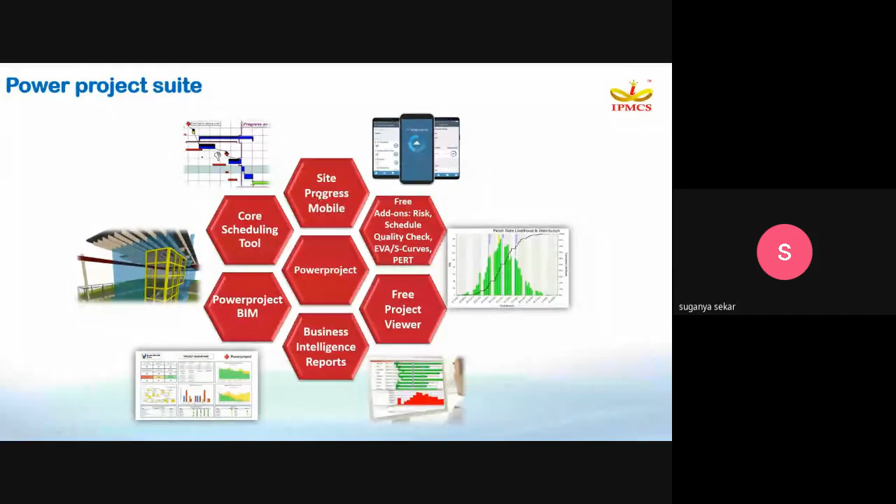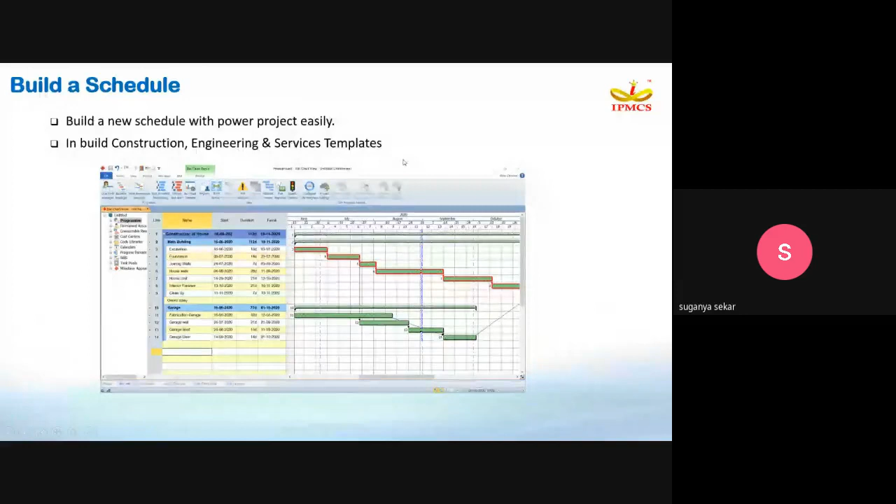In Power Project, you can create a new schedule. We have inbuilt construction, engineering, and services templates available. You can also access schedules formed in other project management software, for example Primavera or MS Project. If you already created a schedule in a different format, you can open that project in Power Project directly without any data loss.

Let's see how to create a schedule. I'm opening Power Project software.

Once the Power Project software has been opened, you can go to File and create new. Under new, you can see a lot of templates available: construction, engineering, housing, MSP, Primavera, services, and so on. If you want to create a project related to construction, you can choose the construction template. The advantage is that inbuilt construction related codes and resources will be available as samples.

Select construction template, then give the project name: construction of building. Then you can give the file name, Project 1, and click create. Just give OK. Now the project schedule has been created.

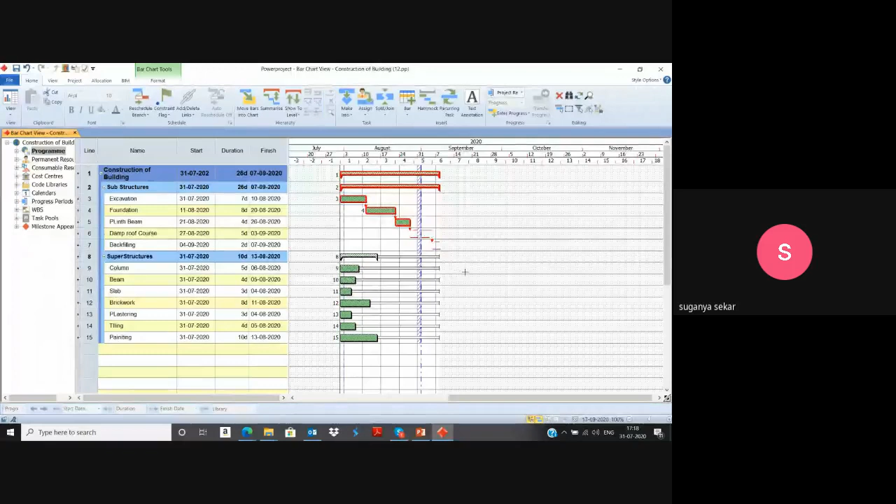Suppose if you want to make it start to start also, then you can give it. So after completing the backfilling, I'm starting the column activity. Then after column, beam will come, whereas column, beam and slab are parallel, so I'm giving start to start. Next, after completing the beam and slab only, I can do brickwork. Similarly, you can give multiple relationships also, then after that you can give the start to start.

As well as you can give the finish to finish relationship between some of the activities. So after giving the relationships, again give the reschedule. Now you can see parallel activities also there, like start to start, whereas here finish to finish. So I'm giving plastering and tiling together as a finish to finish. So like this, you can change the relationship.

By default you can apply sequential relationship. Suppose if you want to complete the project, if you want to do the schedule compression, then you can go for start to start and finish to finish relationships.

So after applying the relationships, you can see the activities displaying in a red color, like red color borders. Red color borders mean critical activity, and without red means it's a non-critical activity. So as we already discussed, if you delay a critical activity, it will directly impact the finish date, whereas if you delay a non-critical activity, it will not impact the finish date.

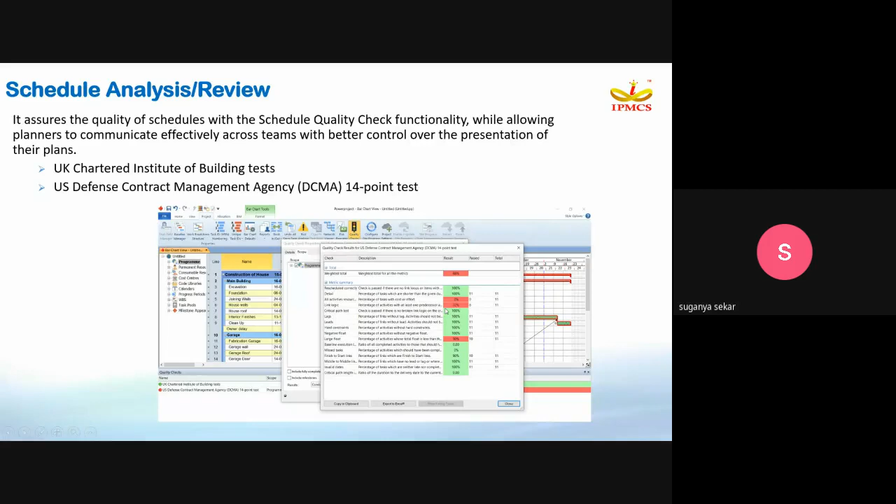There are 14 points available. Whether this schedule has satisfied those 14 points or not, this information can be fetched from this quality check functionality. You can see the attached screenshot. So similarly, we can run this quality check functionality here.

Go to the project tab. Here you have the quality checks. Select this and you can run the project schedule, either UK Chartered or US Defense. I'm going to run the 14-point assessment. Right click, select properties, then select scope, check in the overall project, and execute.

So right now the schedule has been framed with link logic. The first activity and last activity without predecessor and successor is acceptable. This report will be helpful for you to present your plan confidently. Close.

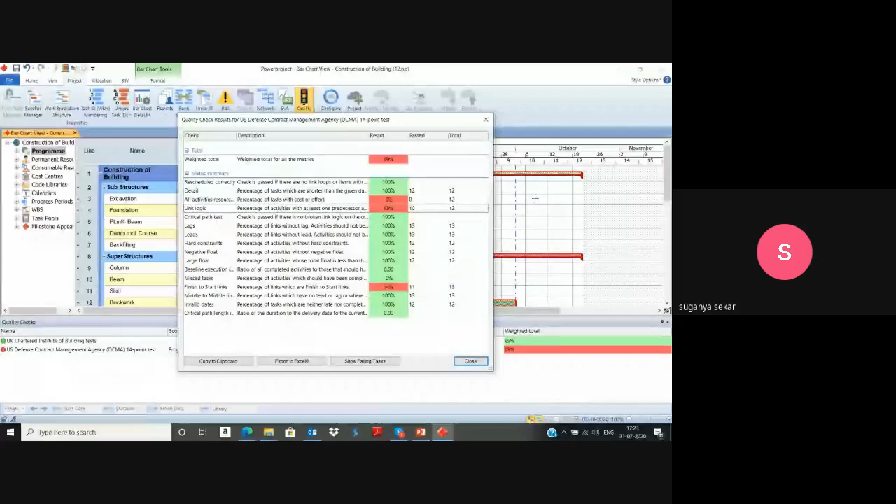Next, after running the schedule analysis, we'll move on to cost or resource management. When a plan is completely ready, you have to prepare scheduling and then resource management. Scheduling has been completed, next is resource management.

Resources means anything required to complete the project. Generally in projects we follow two kinds of contracts: unit rate contract as well as lump sum contract. You can capture these using resources.

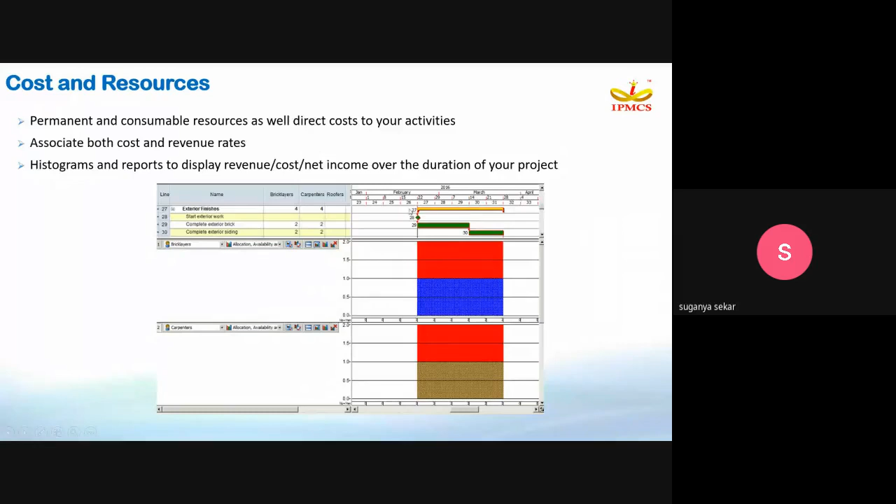Here we have permanent and consumable resources available. You can generate income and cash flow reports also. In other software, you can analyze only one single resource or histogram in a single page, whereas here in Power Project, in the same page itself, multiple histograms can be viewed.

So go to Power Project. I'm creating one resource here. You can see the project view, permanent resource and consumable. Human resources and machineries can be created under permanent resource, whereas materials or supplies can be created under consumable.

So you can create a permanent resource. I'm creating a new permanent resource, one is civil engineer. So how many civil engineers are available? One civil engineer, or two, or three - that information can be entered here.

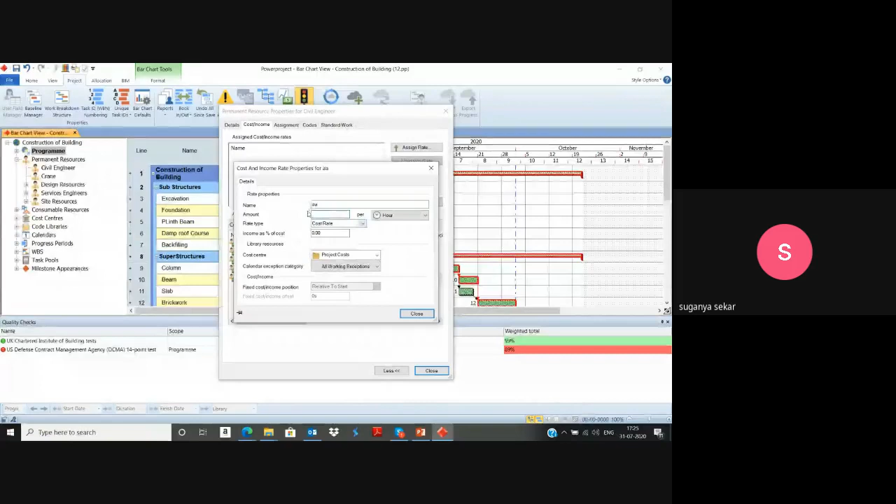Then you can go to cost or income and create the cost. Double click - what is the cost for this civil engineer? 500 per day. You can enter it per day or per hour. Close. Now you can assign this cost.

Then go to assignment. You can check the assignments.

Next, you can create resources like cranes already available. Here you can see under consumable resources, bricks are available.

Now you can assign these resources to the activities. You can select one activity, or if you want to assign for all activities, using shift you can select all the activities in the bar chart. Now you can assign civil engineer for all the activities.

Whereas cranes, you're going to assign only for the excavation activity. Then bricks can be assigned to the foundation activity. So like this, you'll be assigning all the resources.

So after assigning the resource, you can analyze here. In the bar chart, resource graphs are also displaying resource bars. If you don't want to view the resource bars, using format, you can remove that.

Next, we want to generate the resource analysis. Resource creation has been done and assigning has been done. Next is analyzing, so for analyzing we will go for the resource histogram or spreadsheet. I'll go for the resource histogram, choosing the resources: civil engineer, cranes, and bricks.

Next, you want to see the allocation availability for all the resources together. So you can check here, otherwise you can check only allocation to date.

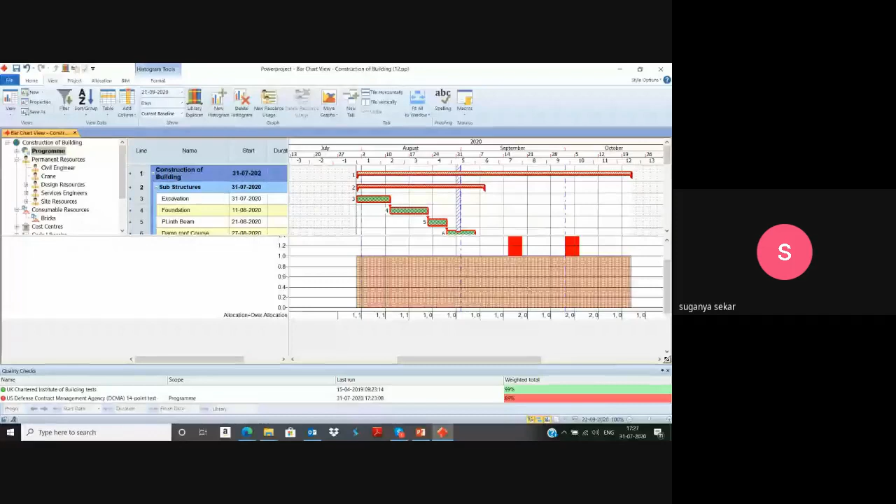So these are the places the resources are overloaded. Checking civil engineer alone, we have only one civil engineer. On these particular dates, we need 2 civil engineers. So this shows the over allocation.

Also, you can analyze the resource usage spreadsheet. You can see here it's properly allocated showing in green color, over allocation showing in red color. Suppose if anywhere under allocation happened, it will show the blue color.

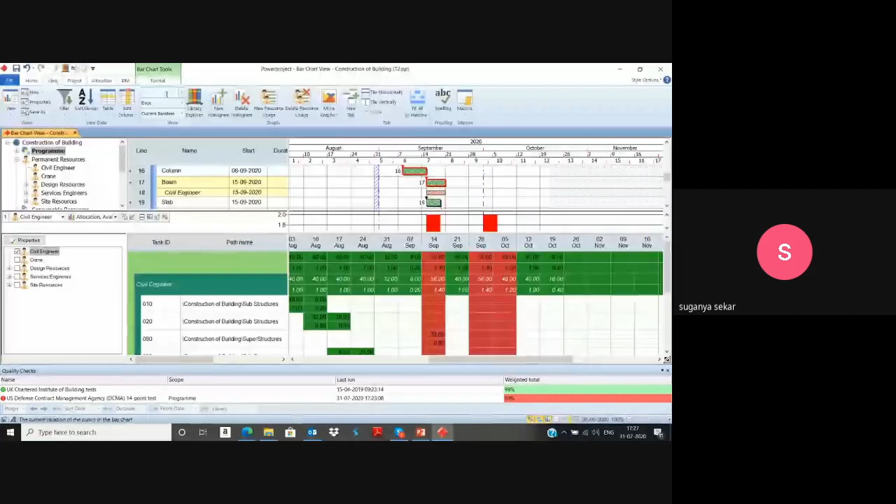For example, I'll be displaying the resource bars and deleting civil engineer for some of the activities. So those places it will be free. This is how you'll be viewing the resource graphs.

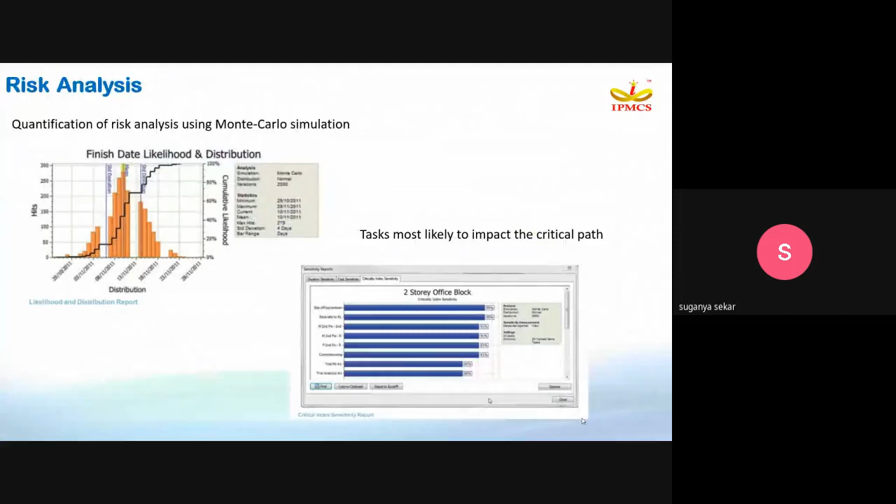After assigning resources, the plan is ready. Next, you need to go for the risk analysis. You can run the risk analysis here. Go to project tab, select risk analysis, go to results, select generate.

If you give generate, it will generate the possibilities. There's like 20% chances to complete on this date or this cost. So 10 different possibilities have been given, including 10% chances to complete the project on 15 October.

You can see the finish dates also. From the schedule, it has generated 20th October, whereas maximum 26th I can complete. So using this, you can fix the buffer time as 6 days.

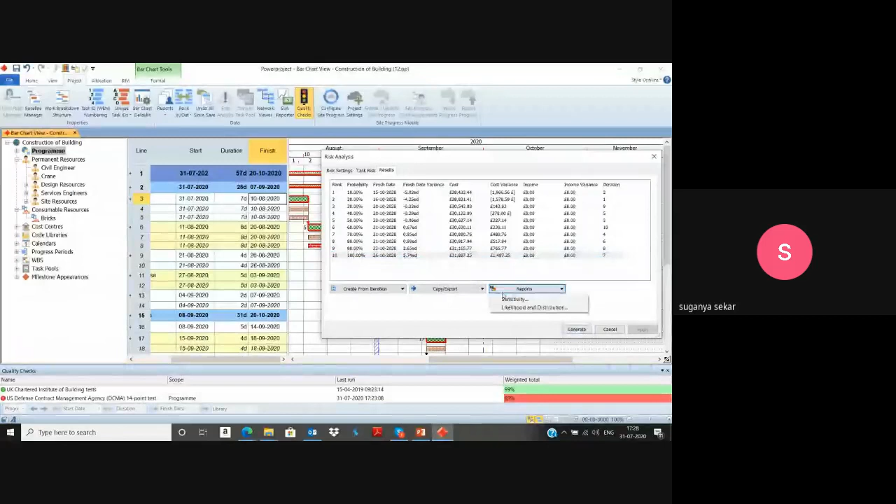Suppose if any delay happens, it will consume within the 6 days. If not, you'll be completing the project ahead of schedule. You can generate this risk report in a graphical format also, duration wise, cost wise, income, margin.

Similarly, you can generate the sensitivity report: cost sensitivity, criticality, as well as duration sensitivity.

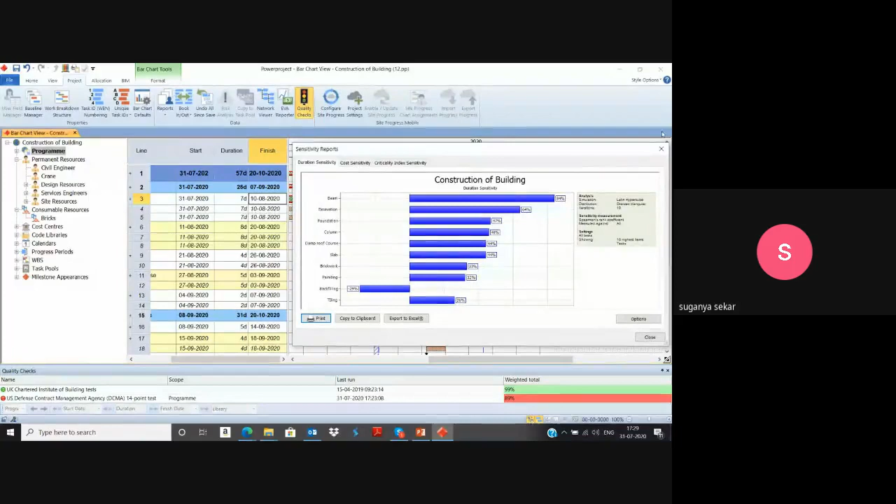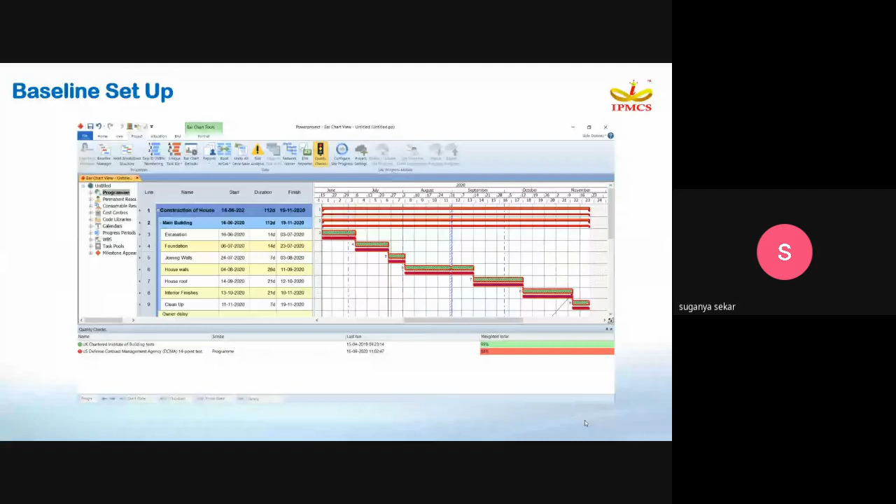So once the plan has been ready, the next step is you need to set the baselines. Baseline is nothing but freezing the plan in the project management software. I'm going to save a copy of this plan.

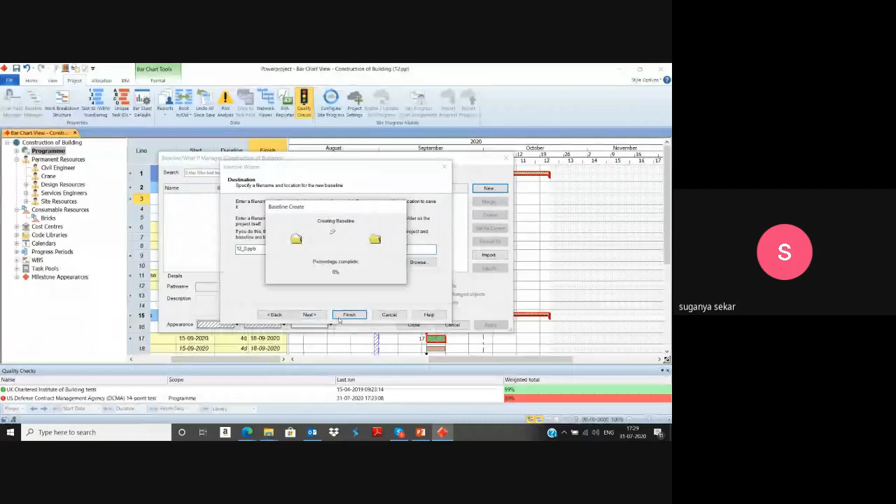Go to project tab, select baseline manager. You can create new; I'm giving R0 or baseline 1. Next, finish. Once the baseline has been created, close.

You can see here the baseline is also displaying. Even for the resource bars, baseline is displaying. You can hide that so only the normal bars are visible here.

So after the baselines, you can start updating your project. You'll be updating the project based on what frequency: weekly, fortnightly, or monthly. First, you need to set the progress periods. You can go to the library explorer.

Here it is showing 31/7. Again, add new progress period; I can give 1, 2, 3. So 31/7 the project is starting, till next week we are going to check 7th August, next is 14th August, next is 21st August. Like that, you'll be setting the progress periods.

Now you can go to the projects page and update the progress. Select the first activity, right click, enter progress. So here you can enter: the project is starting on 31st, ending on 10th, whereas 3 days will be pending. So now you can enter around 70% completed.

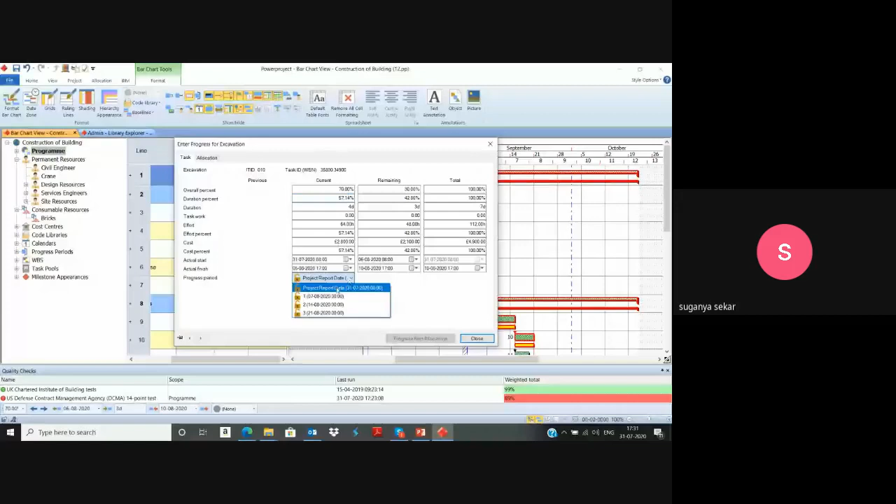Till the first progress period close, you can go to the home tab, select reschedule. Here you can choose the progress date and click OK.

Now you can see the deviations are clearly visible. So you plan to complete on this date, whereas the project is completing on this date. Because of the delay in the first activity, all activities have been delayed by 1 day. The project completion date will also change accordingly.

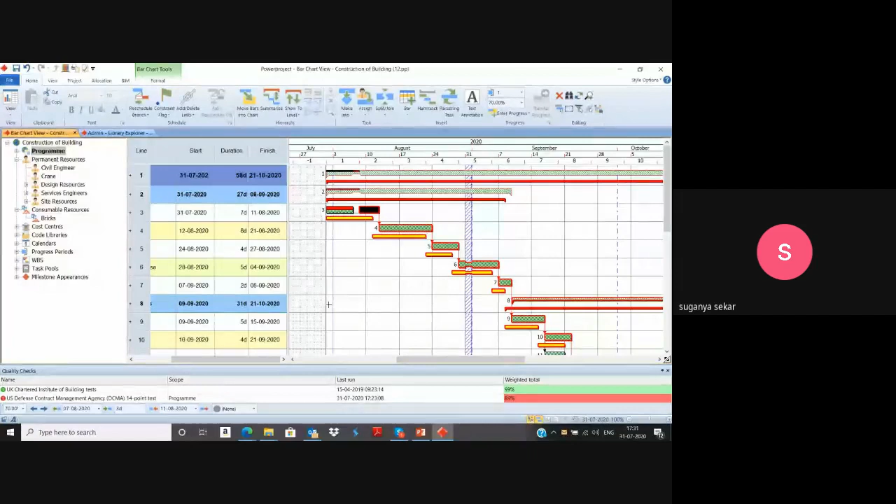This is how you will be maintaining a single project. Also in Power Project, we have seen additional features like risk analysis and schedule quality check functionalities and more.

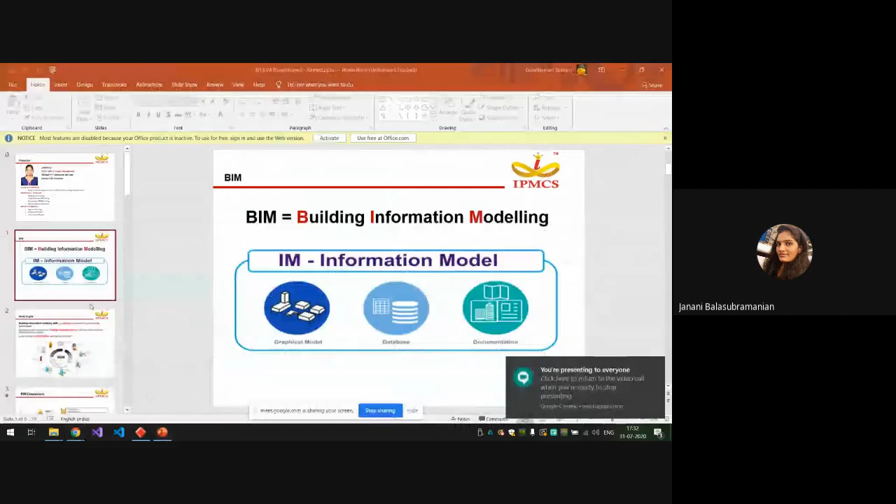I'm the presenter for the next session, which is about Power Project and integrating BIM into Power Project.

We have already seen what is BIM. BIM is building information modeling. Linking our project information to our 3D model of our project is what BIM, building information modeling, is. It is not a tool, it is a concept which we adopt for our construction project. BIM is a process supported by various tools and technologies. It is a generation and management of digital representation of our project information, like physical and functional characteristics of our project. When we implement BIM in our project, it leads us towards working in a collaborative environment.

So we have multiple dimensions in BIM. We saw yesterday what is 3D. 3D is linking the third dimension of our project, which is height, so we get a 3D model useful for visualization and clash analysis purposes. The next dimension is 4D. 4D is linking our project planning and scheduling to our 3D model. Then the model is called a 4D model, not a 3D model.

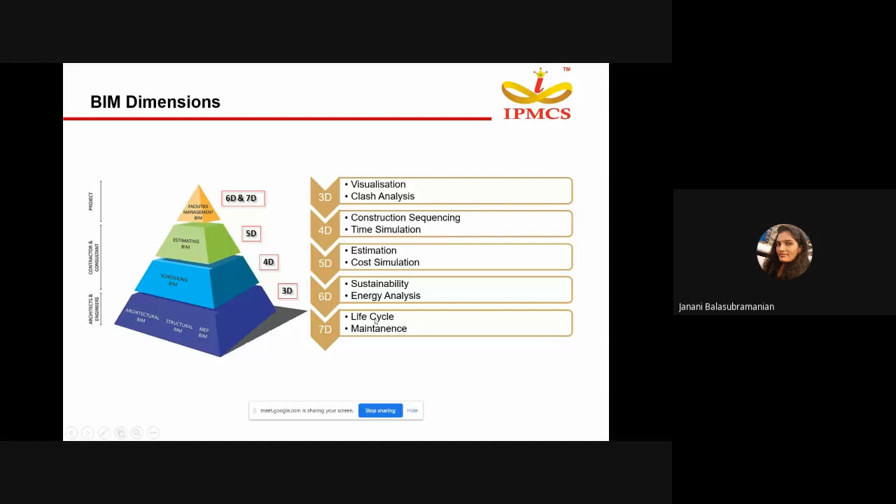So today we are going to focus on the 4D BIM part. 5D is linking the project estimation and budgeting. 6D is linking sustainability and energy analysis data. 7D is linking the as-built information, lifecycle, and maintenance information to the 3D model.

As we saw 4D BIM, let us see in detail. 4D BIM is a process of adding our scheduling data to our project information model, and it helps us have a step-by-step visualization. Rather than seeing our project progress in the Gantt chart, we can also see a step-by-step visualization of our project progress. Stakeholders are people involved in our project, working directly for it, so they can have a detailed overview of the entire process. With this 4D BIM, we can stay on top of everything that happens in our project site.

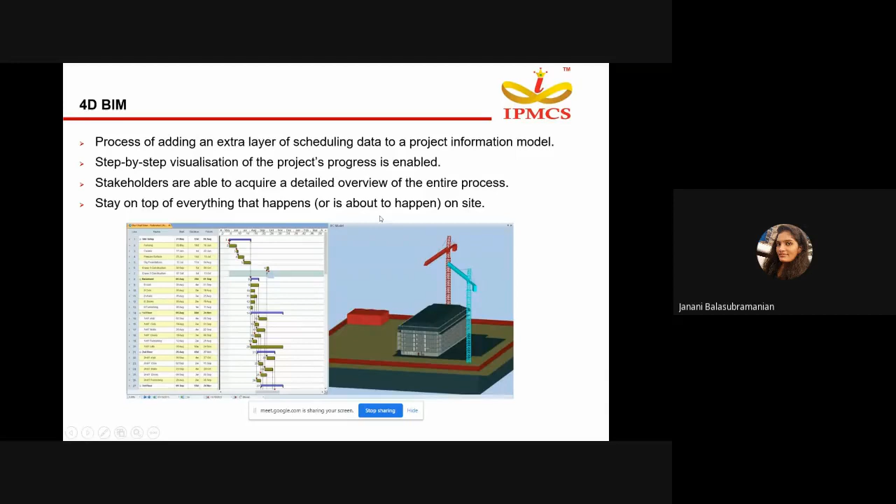4D BIM technology in the construction industry enables us to have clash-free construction scheduling. It helps to do a 4D graphical visualization. We can do optimal resource utilization and better interdisciplinary coordination. Interdisciplinary coordination leads to a collaborative working environment between the project team members.

So 4D BIM, when we link a project schedule to the 3D model, is what is called 4D BIM. The fourth BIM dimension is construction sequencing, which is achievable with the help of the Power Project tool. Power Project is an effective 4D planning and scheduling tool. We can call Power Project an integrated 4D BIM solution because here we can use our 3D or BIM model, and we can create our schedule, or if we have already created a schedule, we can link it to our 3D BIM model. We can do our resource management, risk management, and update our progress information.

So of Power Project features, we have covered project scheduling, resource management, and risk management. Next in this session, we are going to cover what is the 3D visualizer in Power Project, and how to do a 4D simulation — what simulation is, and how to do 4D simulation.

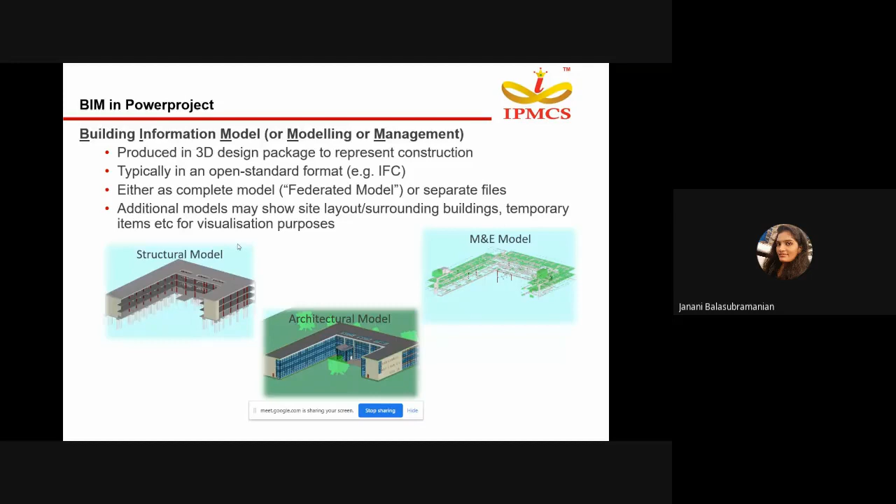So first is about the model walk-in view. Once we import the IFC model into Power Project, we can see the category of each and every element and which category it belongs to. We can see the IFC properties of each element in the entire model, and we can have a walk-in through the model. We can walk inside the model, and we can also see the split view, where rather than a complete model, we can split and view each element separately.

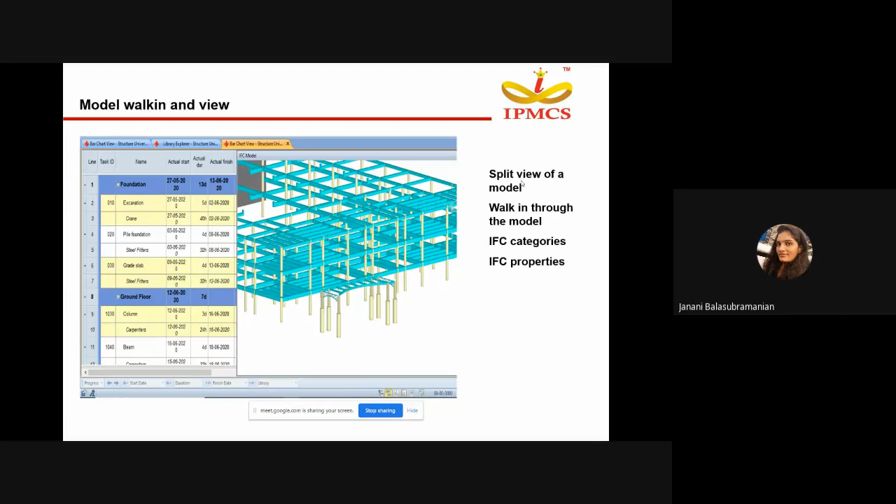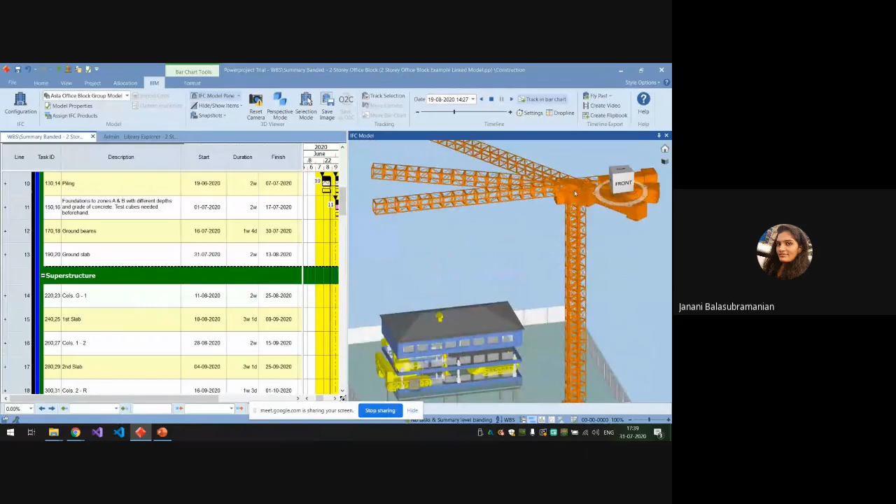Let us see how we can view the model. Say I have already created a schedule here. Now when I want to view the model, I'll use the IFC model pane. So you can see here my IFC model with the complete project information, including the tower crane and the excavator that I use.

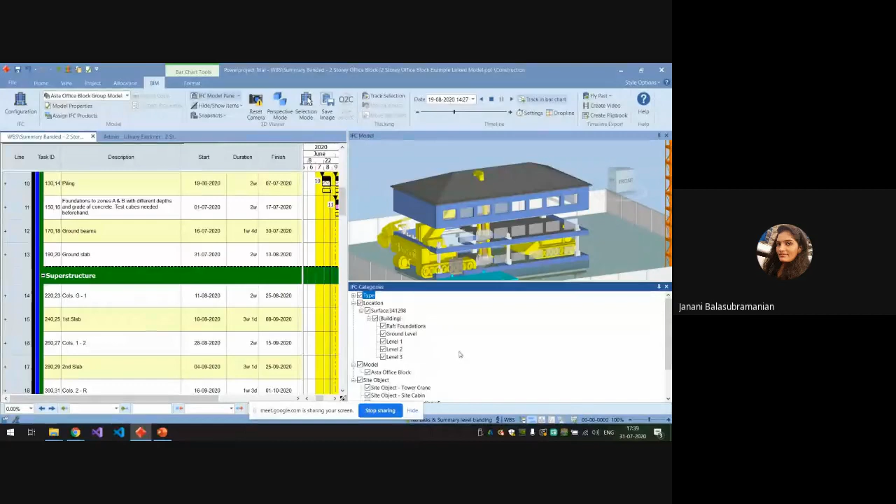When I want to see the properties or categories, from the drop down I'll select categories. Here in the category, the site object, so many site objects are there in this model. And location, again, I can choose when I want to see only the ground floor. I'll select only ground floor elements to be visible. So now if you see, along with the information, only ground floor related elements are visible.

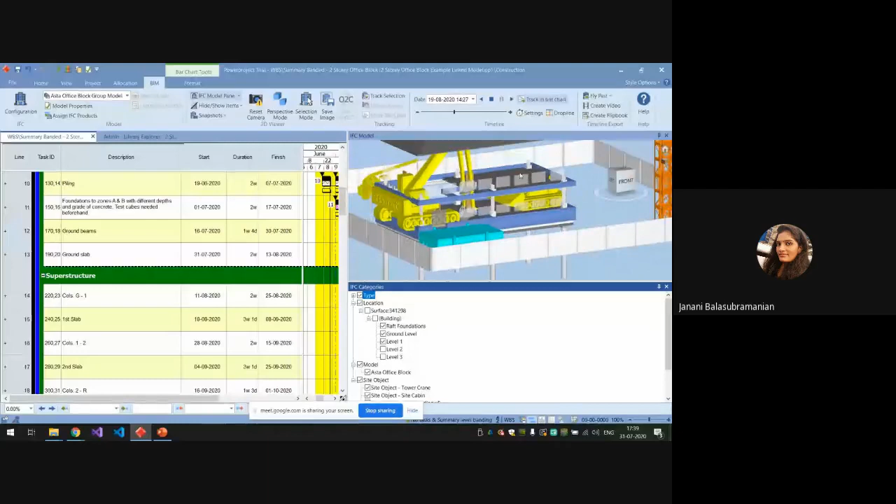Same way, when I want to see the raft foundation, you can see the raft foundation. Level 1 gets built up, level 2 gets built up, level 3 also. So if you want to see the total building, we can see that too. So likewise, you can bifurcate your information.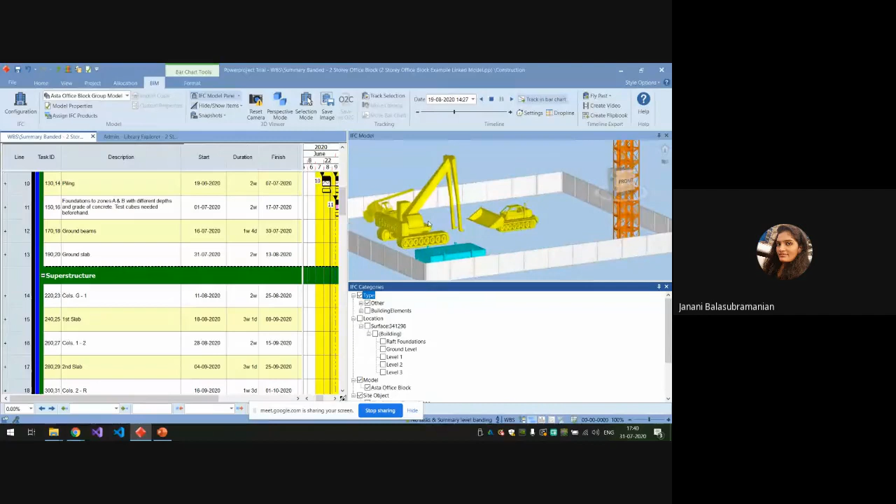And if you want to see only your site machineries, I'll select only site machineries to be visible. So here you can see, within the fence of our project, what machineries we are using - excavator, small bobcat, and the tower crane. Now that we've seen the categories, I will show all elements to be visible.

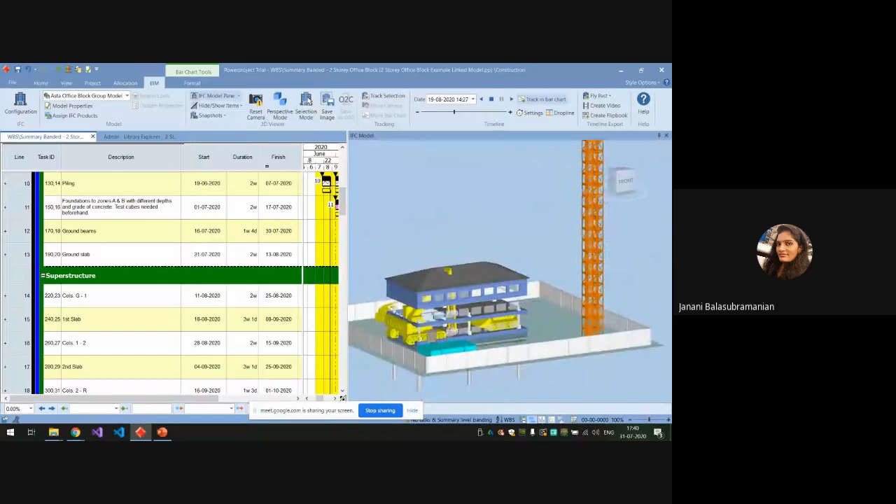Next, when I want to see the property, say I'll select this element. To see the property, I'll again choose IFC property. Say this is a roof, 125 mm thick slab - area of the roof slab, volume, perimeter, width, and whether it is a load bearing slab or a non-load bearing slab.

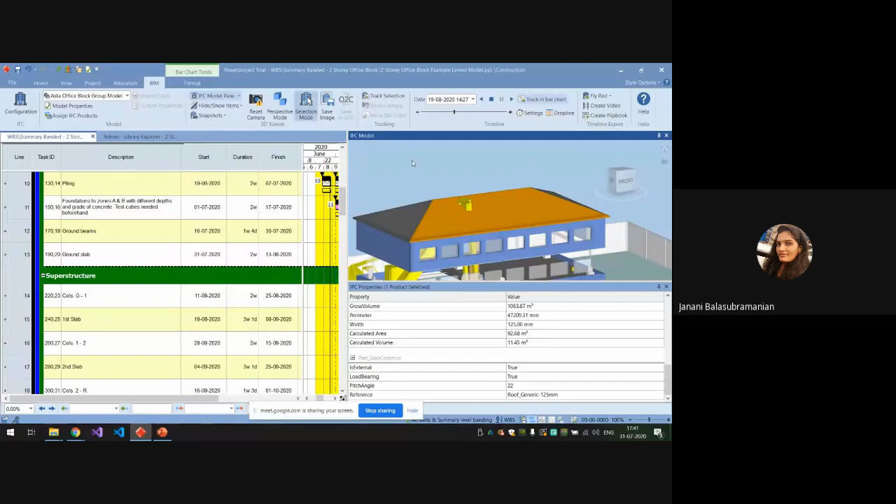Another element, such as this - this is a wall, exterior wall. The material is brick with common fiberglass batt concrete. You can see the wall footprint area and the total area of the wall, height, length, volume, and even the energy data, like thermal resistance, thermal mass, heat transfer coefficient, absorptance value, where it is located, and how it is filled. So all information, including energy analysis data, can also be seen inside Powerproject.

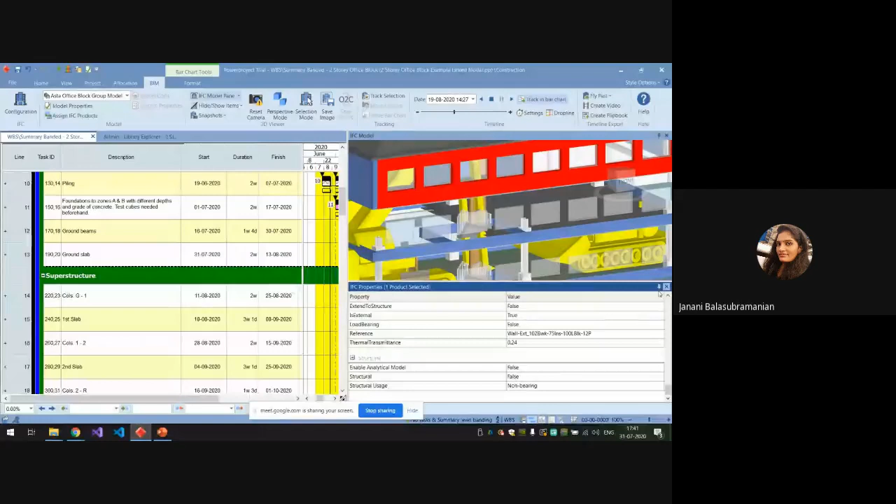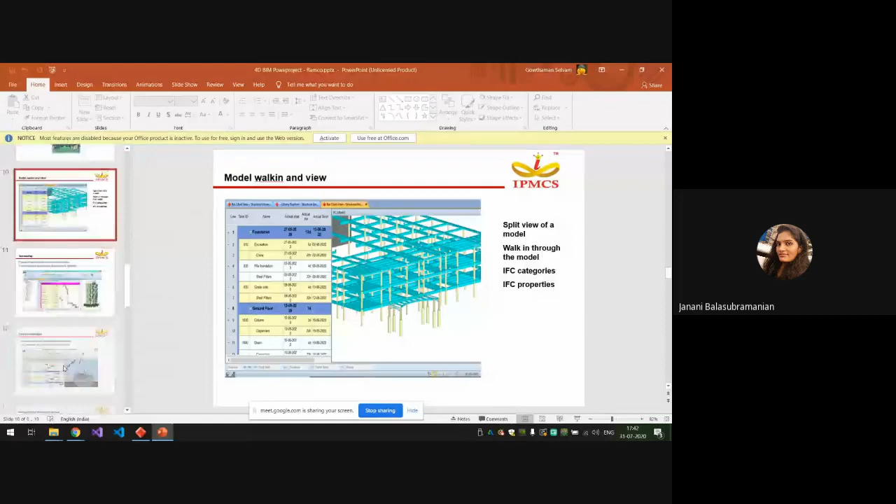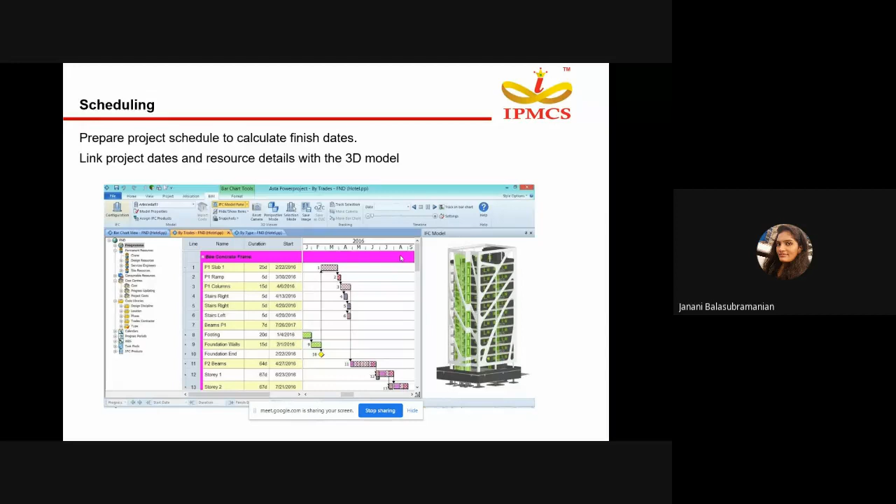Now moving to the presentation - we have seen how to view the model inside Powerproject. Next is about the scheduling part. As I told earlier, if we have an already created schedule, we can link our BIM model to the existing schedule, or we can also prepare a new schedule from the BIM model. So we'll see the scheduling part.

Now, when I want to prepare a schedule from the model, it's just as easy. This schedule is already linked with the model. Now when I want to prepare a new schedule from the model, just select the element, drag it and drop it into the Gantt chart. It will be placed in your Gantt chart, and here you can create your schedule - just drag and drop. Here you can name your element, say this is a wall. So from the model also, you can create your schedule.

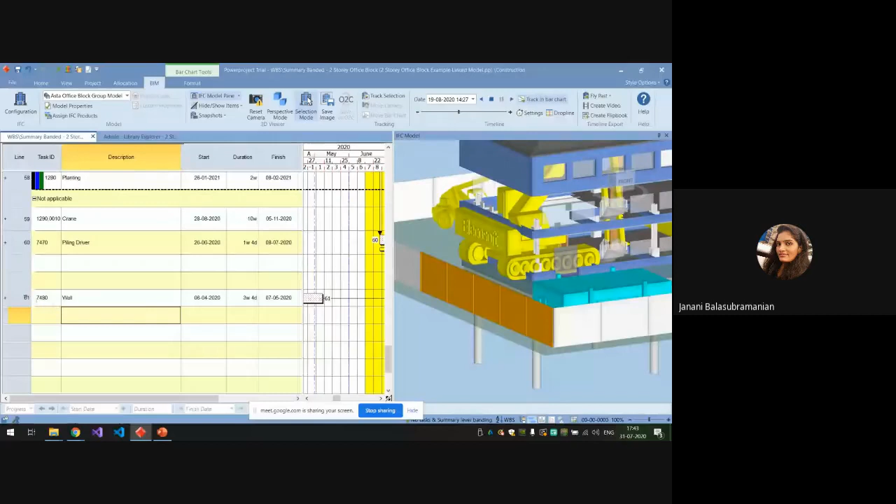I'll delete this. Another way is you can also filter your model. Here in Powerproject we have IFC products and searches. Under IFC products I have foundation walls, ground floor, say foundation walls.

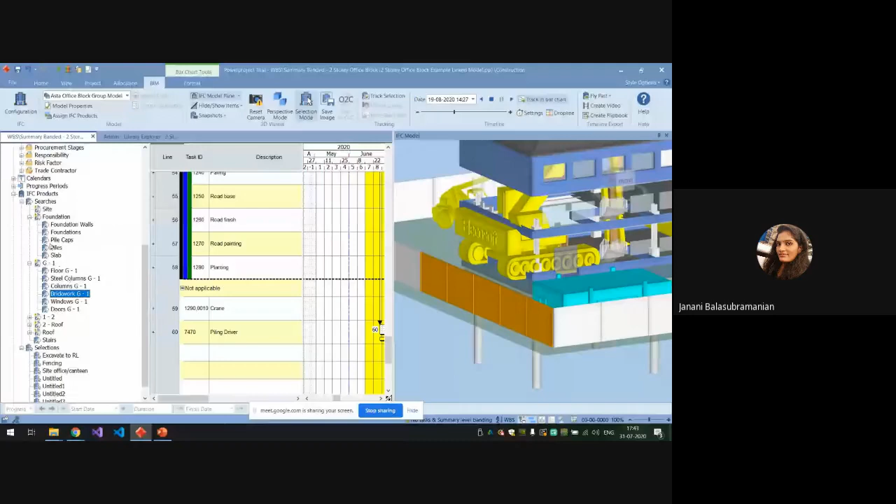So I can see this foundation walls alone from the model just by using filter criteria. I'll make it show in viewer. So you can see this is your foundation wall, which is highlighted in red.

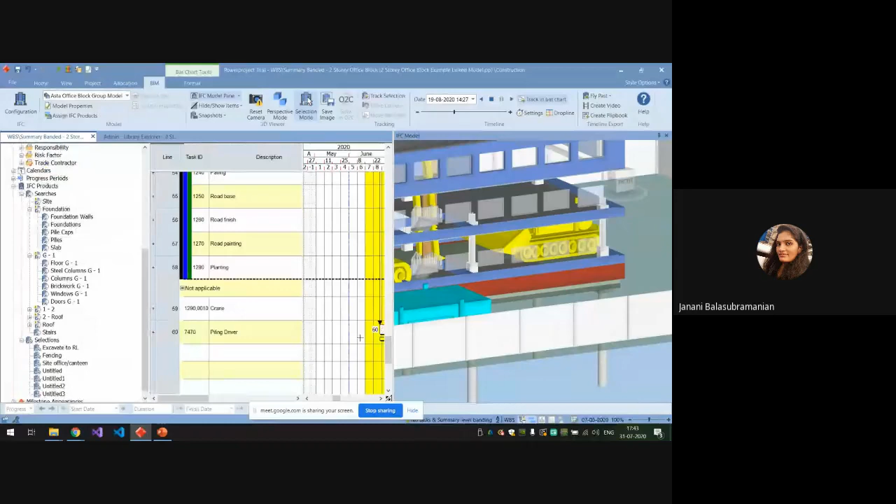When you create this IFC filter criteria, you can also link this criteria to your existing schedule just by dragging and dropping. So this is about preparing the schedule.

Next is about progress updation. Once our baseline schedule is prepared, next is about updating our site information as per the execution team. So we can monitor our project and update the progress information here in Powerproject.

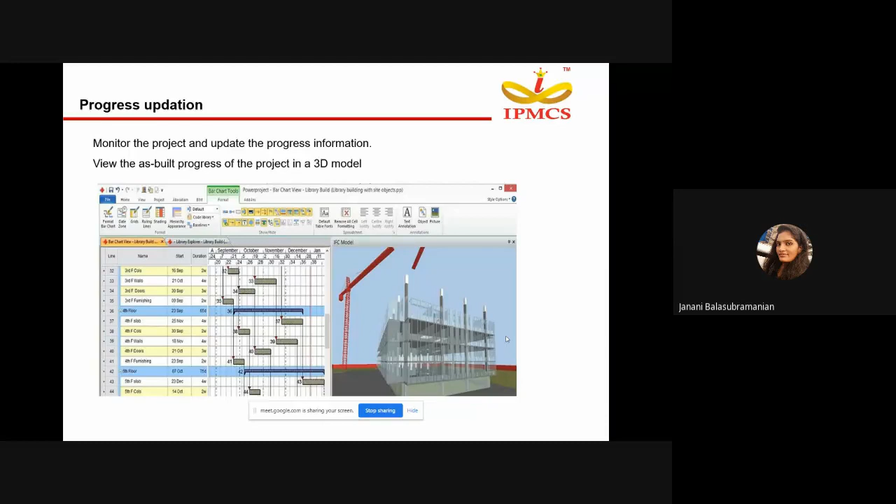The updated progress information can be seen in Gantt chart and also in the form of a 3D model. This project is actually updated with the actual dates and also baseline dates.

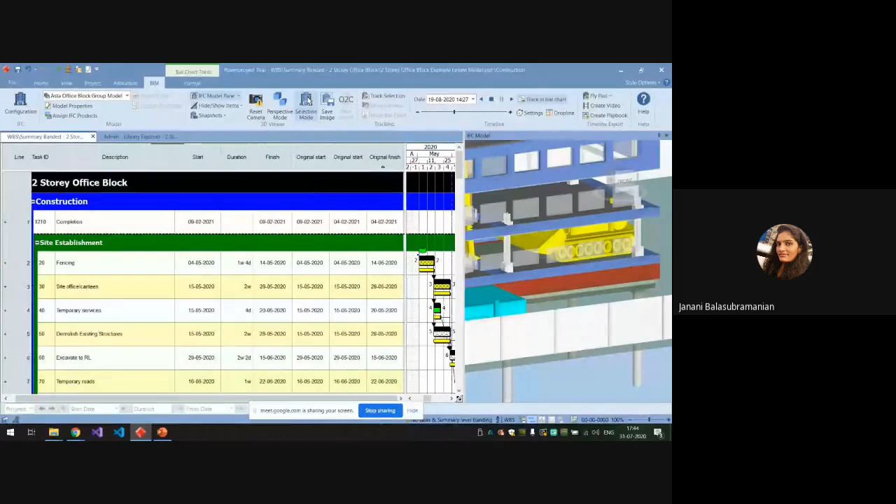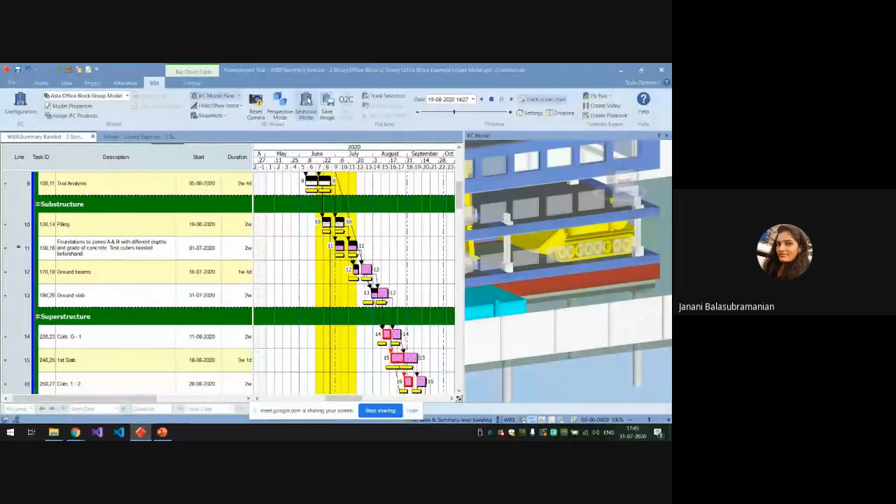I'll show you the dates here. Start and finish are the actual dates. Original start and original finish are the baseline dates. So here my activity is being updated, you can see in the Gantt chart also. There is no deviation till foundation activity, but after foundation there is some deviations in the activities.

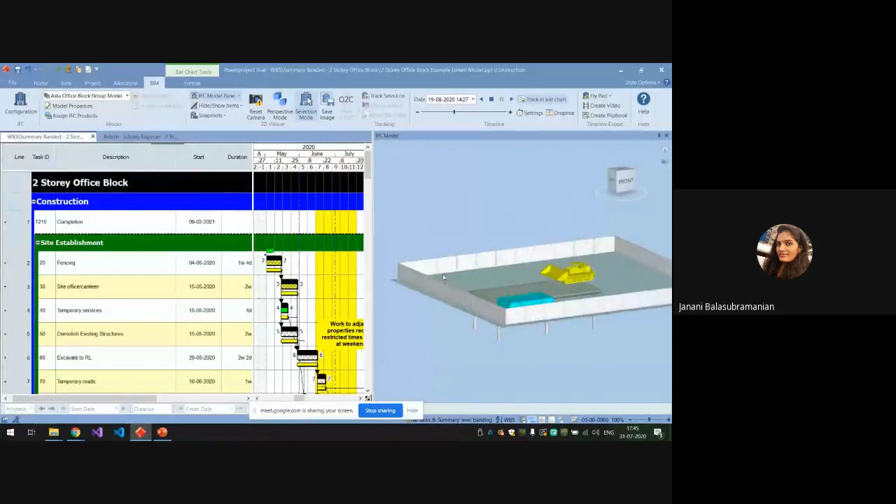This can be seen in the model also. When you want to see what are all the completed elements, give show completed. As per our schedule, the foundation and foundation slab work are completed along with the fencing part.

Show planned, and you will be shown with the planned activities also. Now I'm making it to show all activity.

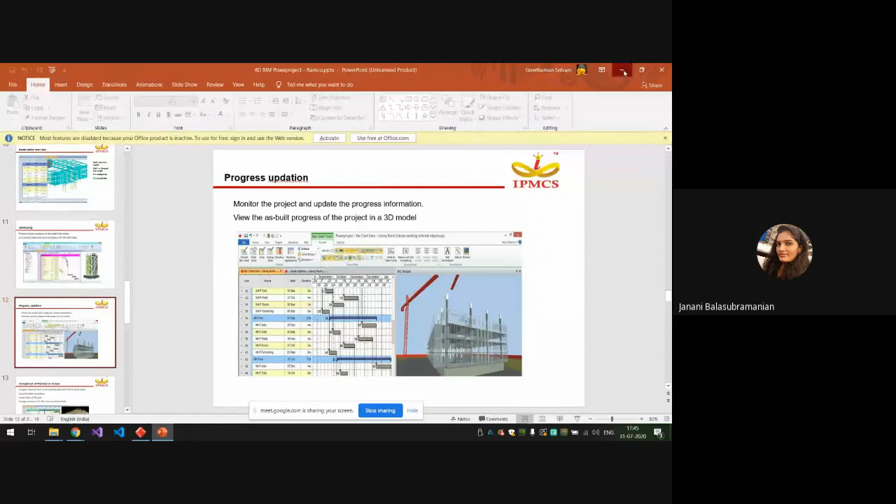Next is about running a simulation. Once we update our progress information, we can also see our information for simulation. For simulation, I'll show you how to run a simulation. Before that, I'll select all elements in the model to be visible.

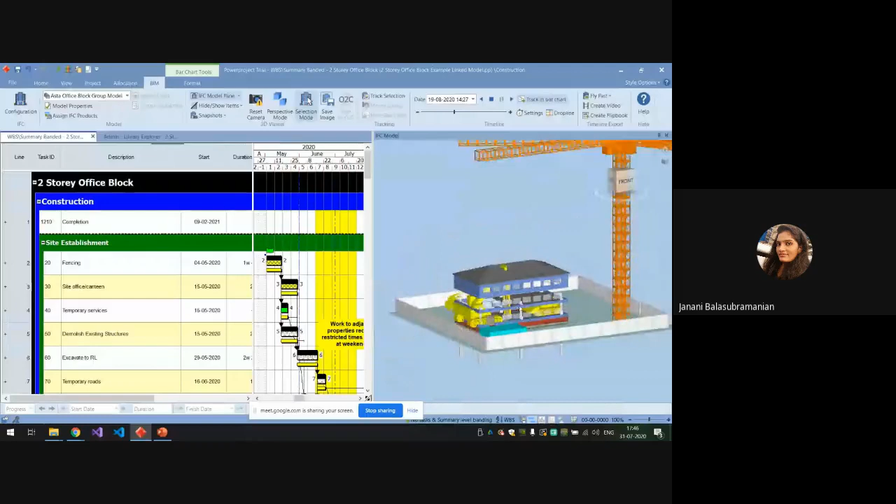Now all elements are being visible. Now I'll make use of baseline dates to be visible. I'm going to run a simulation.

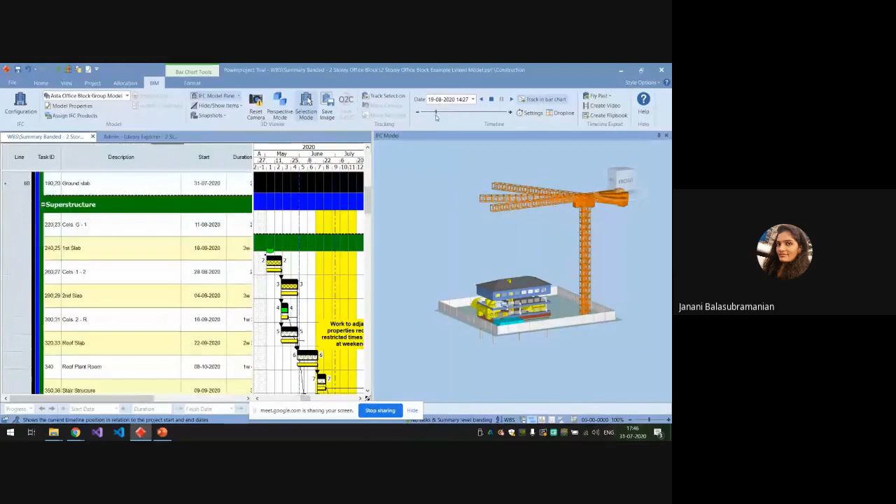This simulation will be running in the Gantt chart and also in the 3D view. I'm starting the simulation. You can see our 3D model is getting built, and even it is getting tracked in the bar chart also. You can see wherever it is completed.

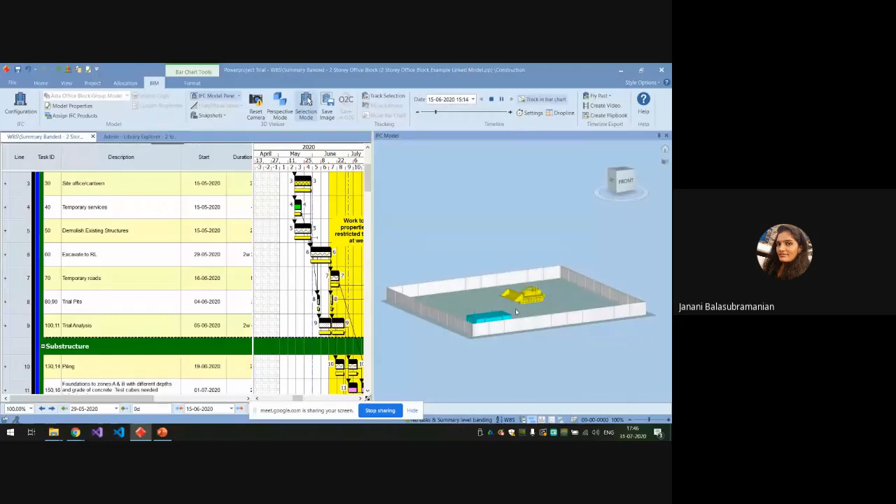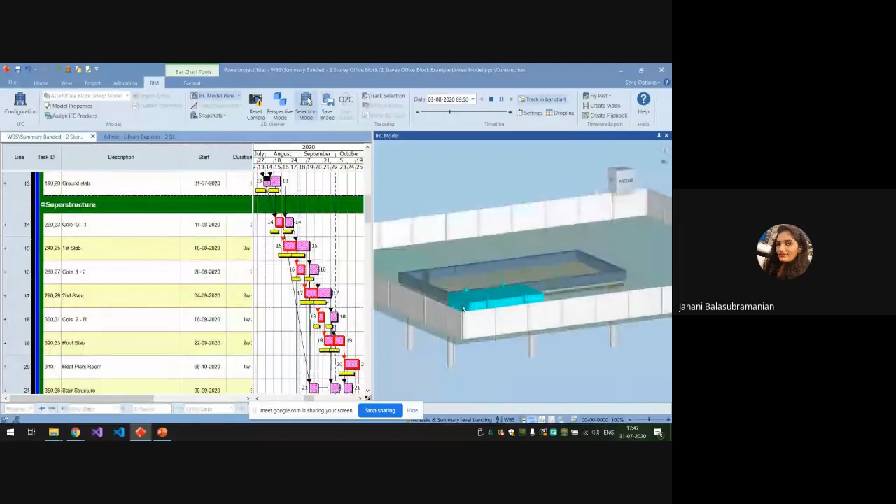You can see foundation work is going on. Now plinth beam work. So our foundation wall, then our columns are getting built. Slabs are getting built.

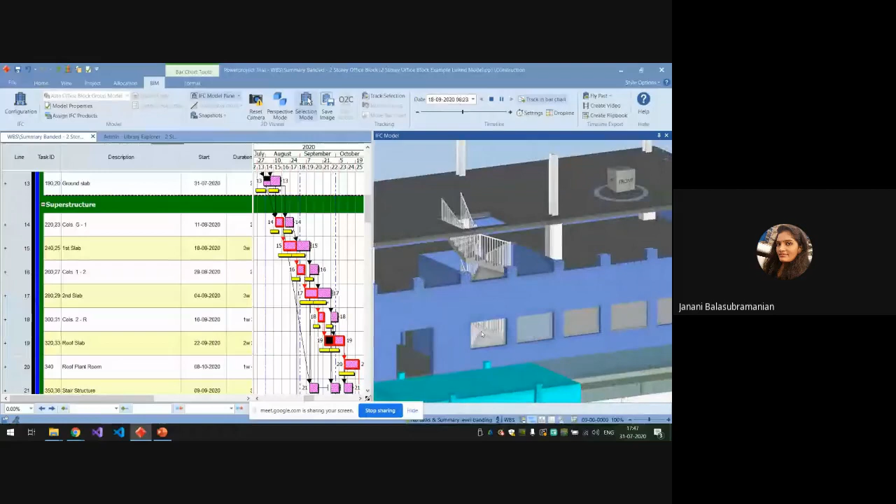Once our foundation work is completed, we are placing the tower crane. The other slabs, other roof slabs, and we can also see how our model is getting built. So this is showing our baseline information.

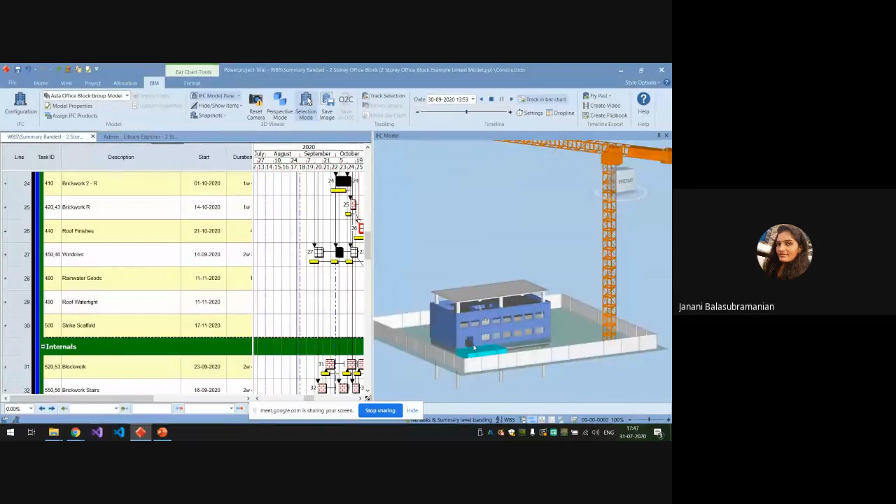Say when you want to see your project at some particular date. Right now we are in July. I want to see by September 30 what will be my project status. You should have completed the 2-floor details and the 3rd floor you will be working on. This is what your information is at September 30.

If you want to see little earlier, on August 31st, what will be your project status? This is called a look ahead plan as per your baseline schedule.

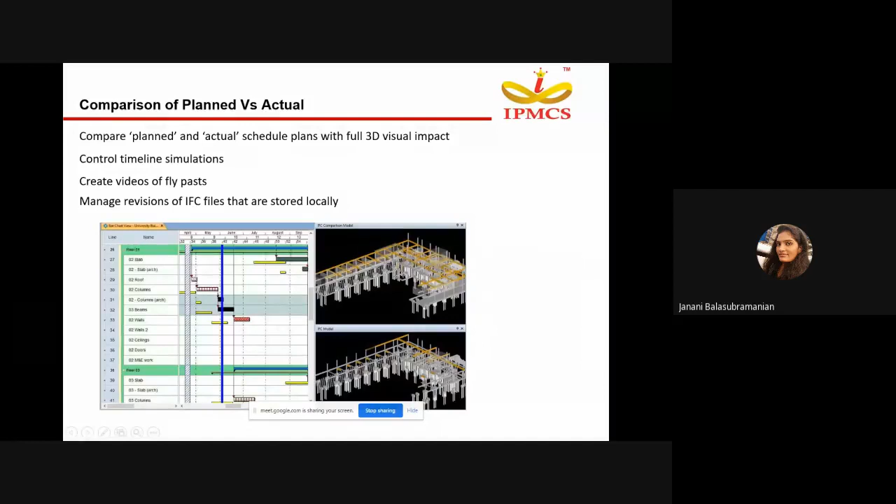Next one is comparing two different models. One model will show you the baseline schedule and another model will show you the schedule, because there will be some deviations as per our actual execution dates from the baseline dates. That comparison we can see in the form of a 3D model in two different windows, and even we can create videos with the simulations, and whenever our model is getting revised, we can update our revisions also easily in Powerproject. Let us see a comparison.

So to do a comparison, I'll go back to the starting. Here in settings, I'll enter: first model should show me the baseline dates, and second model should show me the project live dates. So to which baseline? Current baseline. And I'm closing this.

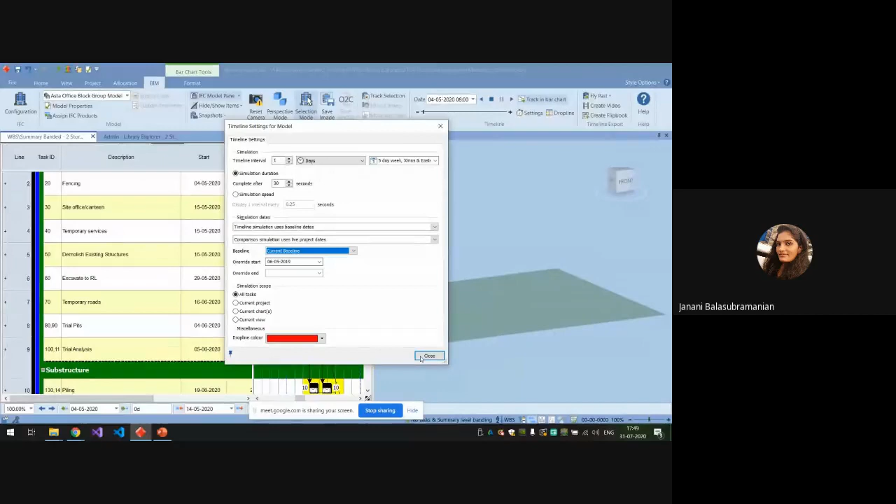Now I'll show the comparison model also. Now you can see here two different models are visible. Now I'll run the simulation. You can see two different models are getting built.

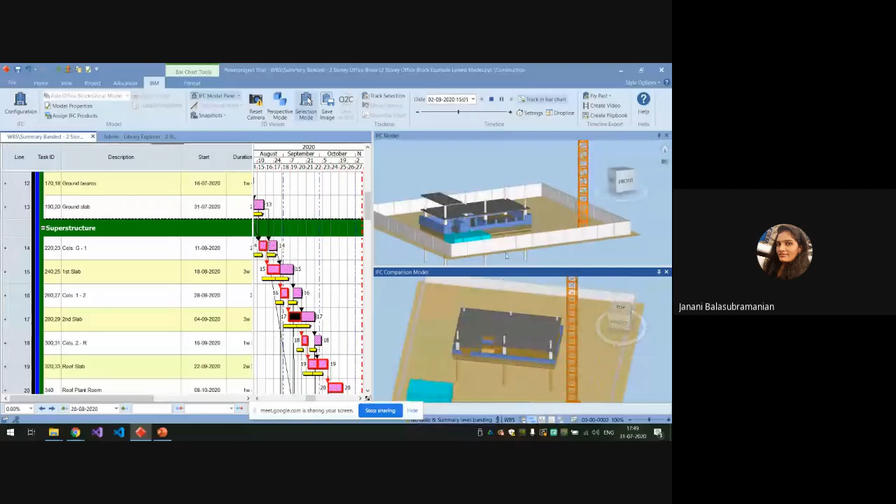Till foundation it is same, but after that there is some difference in the model. First model is our baseline schedule, second model is the actual schedule. You can see the difference also.

So whatever the simulation, you can see the difference.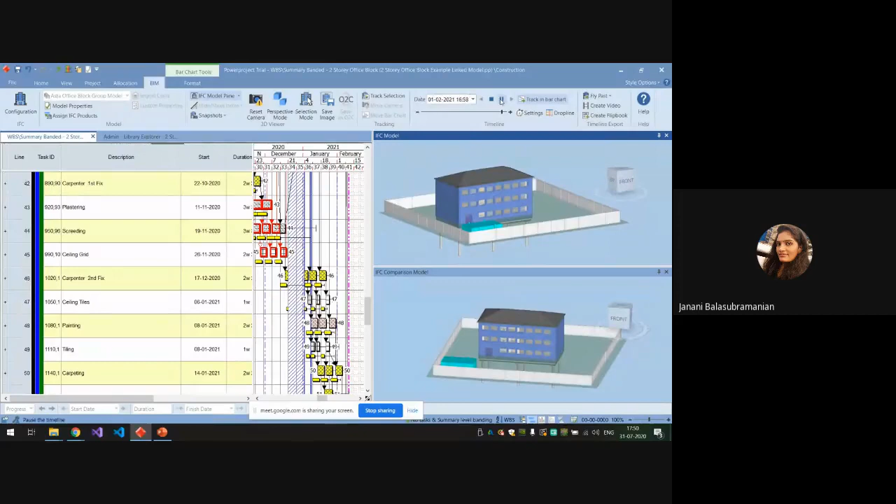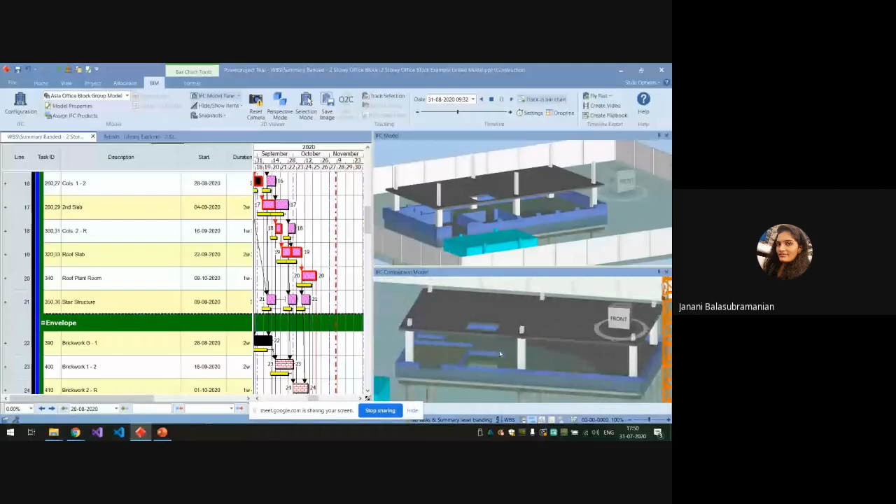If you want to see some particular dates, say August 30-31, what will be your project status? As per August 31st, our ground floor should have been completed and we should have started with the first floor column works. But if you see the actual dates, ground floor itself has not been completed, and we didn't start with the column works for the first floor. So this is how you can see two different model simulations.

Apart from the Gantt chart, you can also view that in the 3D view. And these views can be saved here as a snapshot. Like each and every month, what will be the project date status comparing with your baseline, we can save as a snapshot also.

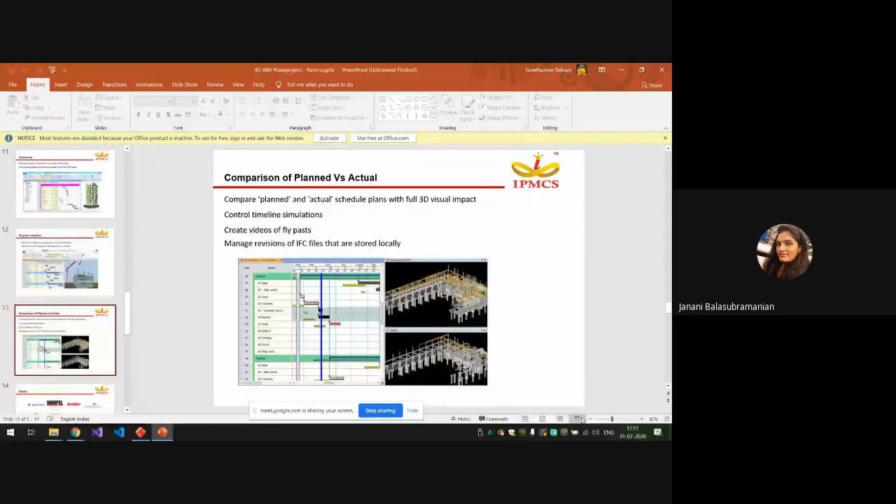So benefits of 4D planning: we can identify problems which will not be visible with our traditional schedules, and we can also run scenarios to assess what will be the feasibility of execution, and we can find the best solution.

We can see the impact of our project delay apart from the Gantt chart, in the 3D view also. And we can also study how the build process will appear at each and every different stage. Say by August month, what will be your project - you can see that in the 3D view. For September month, what will be your project stage. And you can integrate your as-built information also.

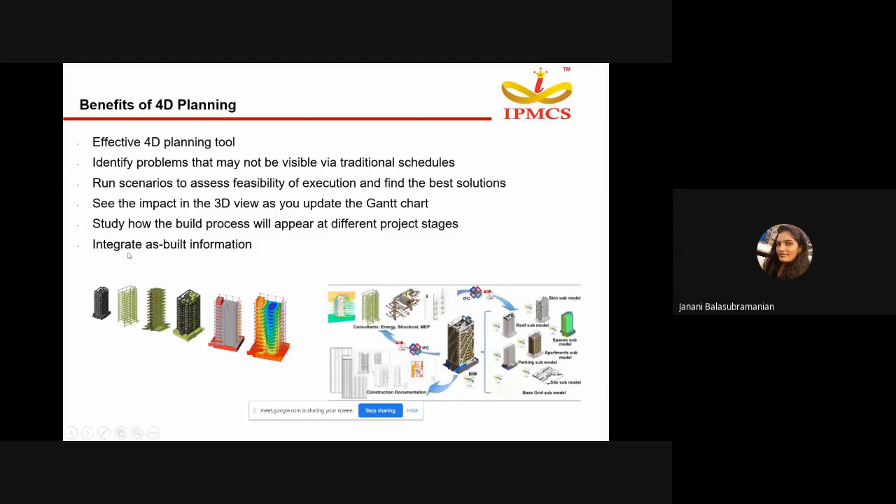The benefits of Power Project - before that, I'll show you how reporting also works. So now we have seen how the BIM model will be working. Now when you want to generate a report, here in Power Project, you can generate some dashboard reports.

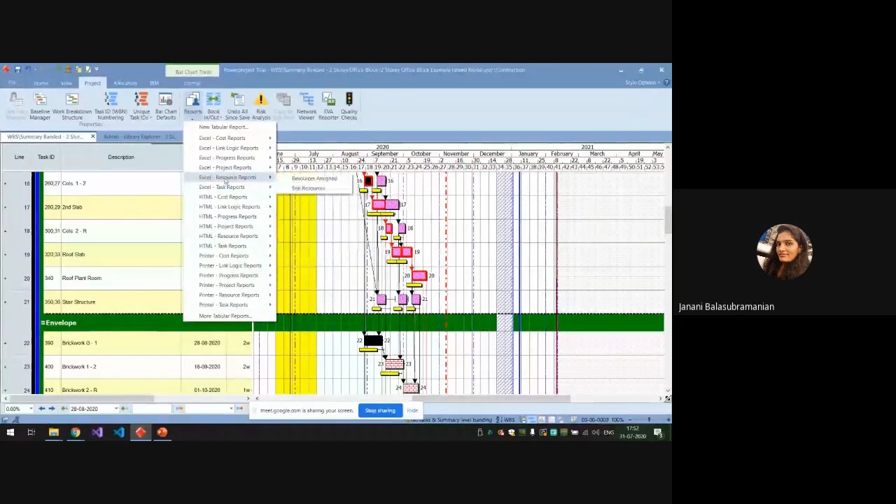So benefits of Power Project: it helps us to have clear visibility and oversight across multiple projects. And since this is involved with 4D BIM, since we can integrate our BIM model of our project with our schedule, it helps us to have a collaborative working environment between our project team members. We can produce customized reports, which helps us to have consistent reporting for our project. We can do improved resource utilization and management across a portfolio of projects. And with Power Project, we can also have better cost monitoring since multiple histograms are available in Power Project.

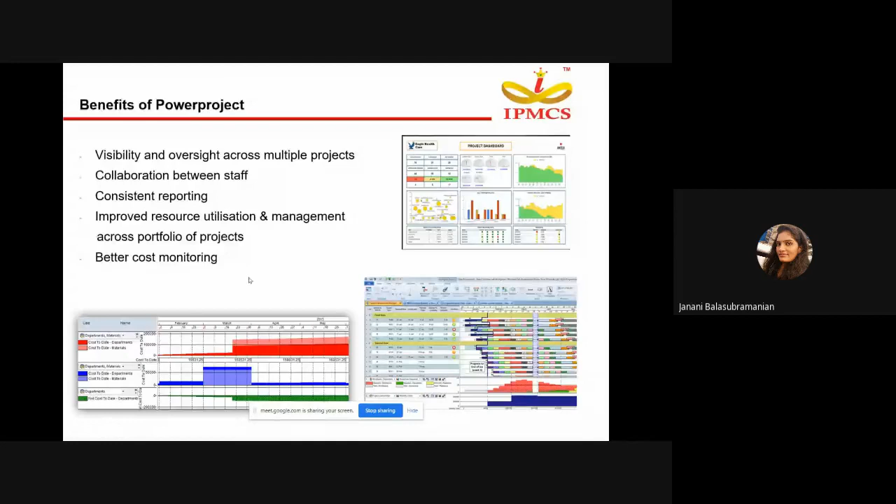So how the role in the construction industry will be - when you are a scheduling or planning engineer with 4D BIM knowledge, you will be starting your career as a sequencing engineer or sequencing planning engineer, with which you will graduate to BIM manager, construction BIM manager, and to a project BIM manager.